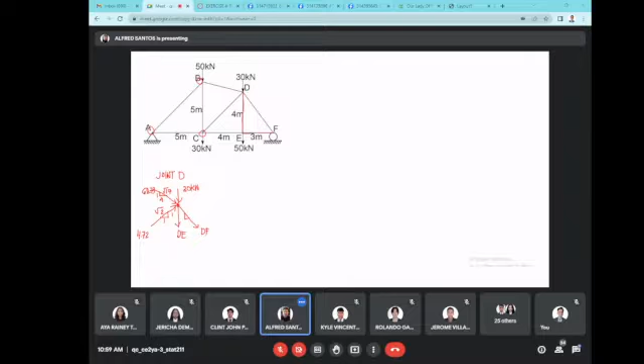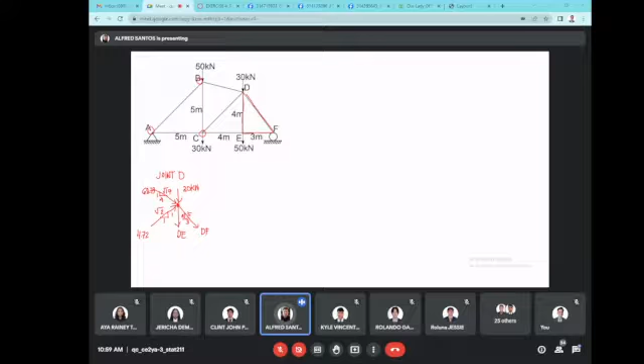So, ano ba sakop na triangle niya? Ito. Di ba? So, that's 3, 4, 5. Okay. So, 3, 4, 5. Okay, so we can now use summation Fx first. Di pwede si Fy kasi dalawa silang unknown sa y.

So, Fx tayo. So, it is positive DF going to the right times 3/5. And then, positive din yung x component ng dalawa kahit compression sila, no? Going to the right parehas, 68.73 times 4/square root of 17. And then, plus 4.72 times 1/square root of 2 is equal to 0.

So, solving for DF, it is equal to negative 68.73 times 4/square root of 17. Lipat ko din sa kabila to. So, 4.72 times 1/square root of 2. And then divided by 3/5. So, your DF is negative 116.89. Tama ba?

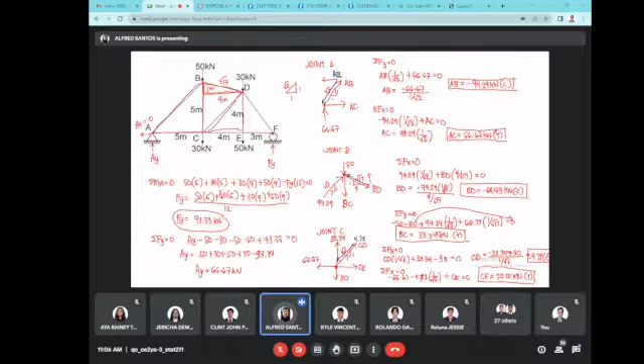May question ba regarding problem number 3 sa method of joints? So, i-resend ko yung notes niyo sa method of joints. So, lahat yan, kasama na siya dito, from the introduction until dun sa last problem. May question so far? Method of joints? Na-refresh na?

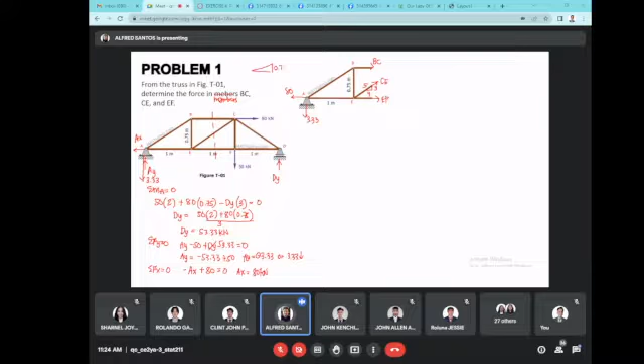So isolate the left section, expose mo lahat ng forces. This is 3.33. This is 80. And then you have here your BC, unknown, so assume natin tension. Same goes with CE, tension, unknown. EF, tension, unknown din siya. Let's first solve for the slope of CE. Ano slope ni CE? It is 3, 4, 5. Same as 0.75, 1, 1.25. Parehas lang yan. Na-explain ko na last time, divided by 0.25 each, kaya naging 3, 4, 5.

So saan ako magmo-moment? That's your first step. Moment sa point kung saan nag-intersect yung dalawang members. Saan point nag-intersect? Point E. So pag nag-moment ako sa E, 0 yung moment ni 80, kasi dadaan siya kay point E. And then si CE saka si EF, 0 din yung moment nila. So we can solve for BC.

So, BC multiplied by 0.75, that's clockwise, so positive. And then minus 3.33 times 1 is equal to 0. So BC is 3.33 over 0.75, or BC is equal to 4.44 kilonewton tension. Tama, mali? Tama po. Okay, so that's your BC, 4.44 kilonewton tension.

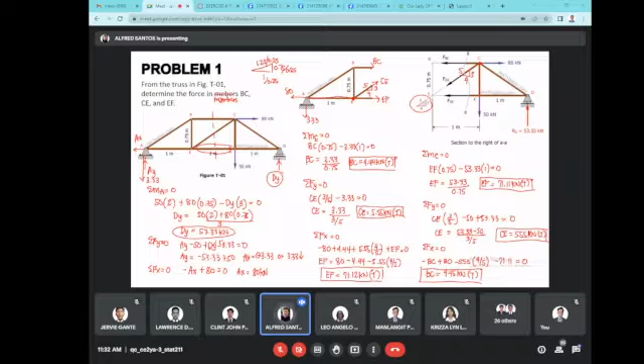So, yan yung method of section. Again, you can consider the left or the right. Pinakita ko lang parehas, para alam nyo kung ano yung ma-encounter nyo sa left and sa right. So yung mga next problem, piliin na natin yung mas konti yung load, yung less complicated i-analyze na section. Okay, so let's start with problem 2, kung wala nang question sa problem 1.

So the roof truss shown in figure T-03 is pinned at point A and supported by a roller at H. Determine the force in member DG. So roller si H, isa lang yung reaction niya, si HY. And then pin or hinge si A, so dalawa yan, AY and AX, which is equal to 0 si AX kasi wala kang load sa horizontal direction. Pag siya lang mag-isa, 0 lagi siya. Okay, so AY tayo saka HY.

Which side yung i-consider ko, kung pinapahanap sa problem yung force sa member DG? So this is your member DG. So dito yung section line natin. So it's either you consider the left or the right.

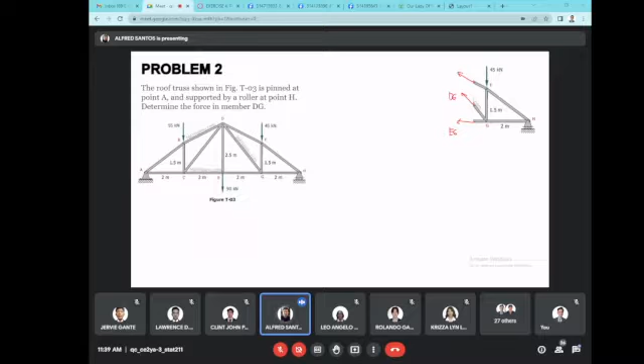Okay, so drawing natin dito para hindi kayo malito sa figure. So this is your DF, this is your DG. So yung DF, papalitan ko na siya ng X and Y component. Nabura lahat. Na-erase ko lahat ng sulat sa slides. Anyway, may naka-save naman ako. So this is EG, DG, and DF. Huwag na natin ulitin yung slope. Alam niyo na this is 1, 2, square root of 5, and then this is 5, 4, square root of 41. Or pwede natin gamitin 2, 2.5, and square root of 41 over 2.

So pag nag-moment ako kay G, kailangan ko munang i-resolve si DF into X and Y component. So this is your DF. Burahin ko na siya. Gawin ko DFY saka DFX. Okay? And then this is your DG. This is your EG. Nasusundan pa ba?

And then this is 92.5 kanina. I-rewrite ko na lang bago ko i-send sa inyo. So, this is 2 meters. This is 1.5 meters. And then, meron ka pang 45 kilonewton dito. So, si DF papunta sa taas and then papunta sa kaliwa. So, ito yung magiging DFX at DFY natin. Nasundan ba?

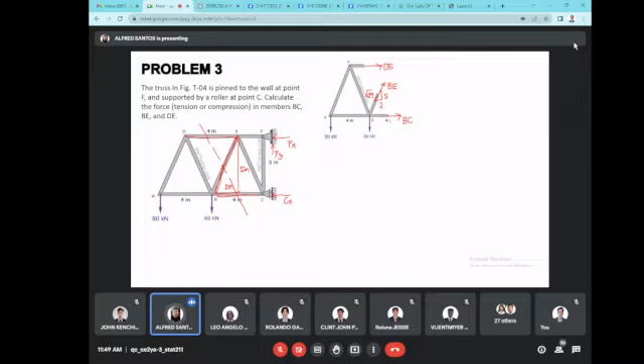Okay, so proceed tayo. Summation moment ako sa point B. Doon nag-intersect si BC sa si BE. So 0 yung moment ng dalawa, same as the moment of 60. So we can solve for DE. So DE, ang distance niya is 5 meters. So horizontal force, vertical distance. And then minus 80 times 4.

Okay? So, practice mag-moment, practice kumuha ng slope. So, this will become 80 times 4 divided by 5 or equal siya sa 64 kilonewton tension, which is positive, no? Kaya tension si DE.

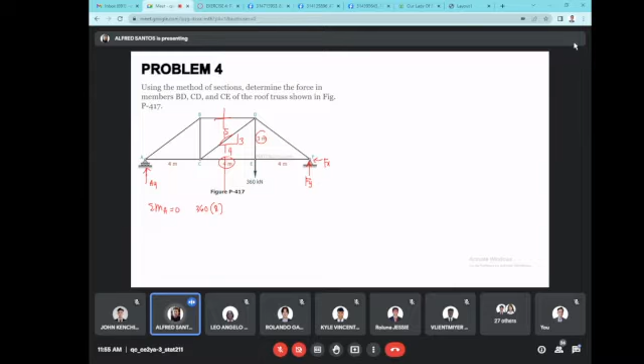So this is your AY. And then hinge to. So you have your FY. And you have your X component ng reaction sa F. Okay? So that will be summation MA is equal to 0. So you have your 360 times 8 clockwise, vertical force, horizontal distance. Counterclockwise naman sa FY, vertical force, horizontal distance, so times 12. Okay, so this is your FY now. This is 360 times 8 over 12. Sige, kayo na mag-solve. Hindi ko na sasagutin.

240. Okay, so that's 240. And then summation FY, so you have your AY minus 360 plus yung vertical component ng reaction sa F, which is 240. So this is negative 120. Lipat mo sa kabila, magiging positive 120. So that's your AY.